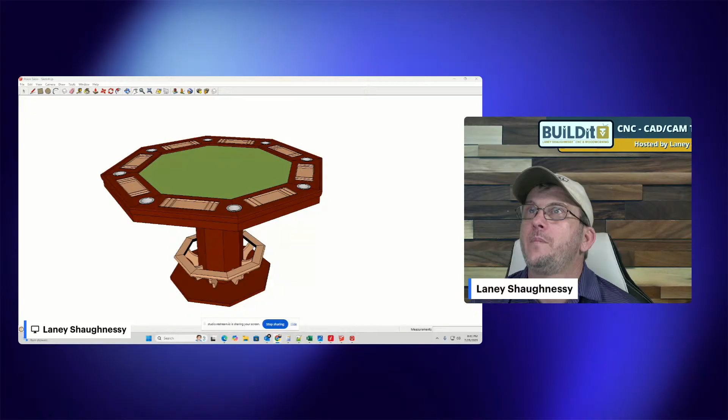Let's talk about the design. Let's switch places here. And the poker table is... let me get this kind of view here. Bear with me just a second.

The poker table itself, from the outside of the trim to the outside of the trim on its short flats areas, we're about 4 foot, so 48, 52 and 3/4 inches altogether, about 52 inches wide, 52 and 3/4 inches wide. And it's an 8-sided octagon table.

As you can see here, I changed up the sides. So after our last class, someone had commented in the comments section. They said, Laney, why aren't you putting the cup holders on the seams so that way it could work for either a left-handed or a right-handed person? And that would give more room for the card area. I went back and looked at it again, and I thought, why not? Why am I not doing that? So the area on the seams are cut out on the parts for the cup holders and all, so it will accommodate for a left-hand or right-hand person.

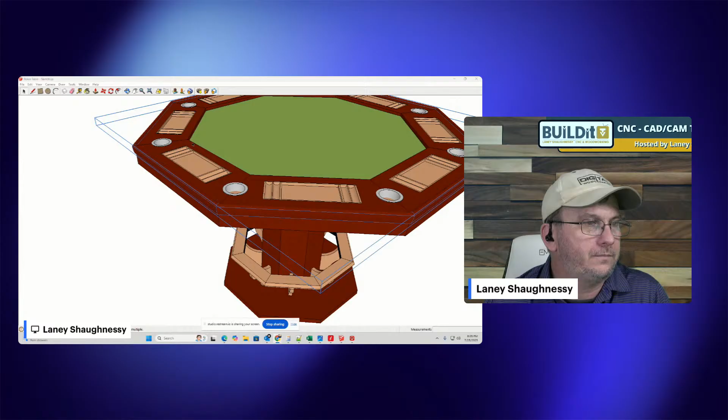Now, the felt in that cushion area is getting wrapped around a piece of 3/4 inch, either MDF or plywood, your choice.

Sorry, guys, if y'all see my hands kind of beat up. I was working out in the yard on the property, and bougainvillea bush, they got big old thorns. It tore me up from the floor up, boy. It kicked my butt, but I won the battle on that little escapade.

So either 3/4 inch plywood or MDF, either one, it doesn't matter at that point. Now, let me hide this for a second. Let me hide these three things just so I can come in here.

There is going to be an apron applied. It's 2 inches wide, 3/4 inch thick, and that's going to be rabbeted in, or it could be butt-jointed in, like I have it here in the drawing. Either one works, underneath those pieces. And then we're going to have a trim.

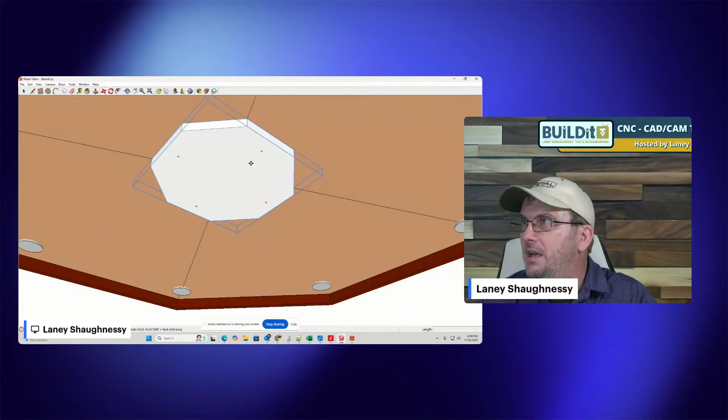There's going to be an octagon plate, MDF again, or plywood, whatever. It's going to be secured underneath, and then the...

Octagon itself, the pedestal — I decided, like we talked about last time, I was going to do the 3 legs, and we're not going to do that. We're going to do a decorative octagon. Now, I didn't do the decorative part in the SketchUp drawing, because I'm just not that good with SketchUp drawing.

But when we get over to the Vectric software, you will be able to see the pedestal parts. Let me get maximized here again.

On the pedestal parts, the octagon, they're going to be 5.5 inch by 3/4 inch boards. They're going to have 22.5 degree miters on each edge, a total of 8 of them, to create that octagon.

But right here in this area, on each of the parts coming around, we're going to have this 3D carving on those pedestal pieces. So we're going to give that pedestal some nice detail. We'll talk about that more in just a minute.

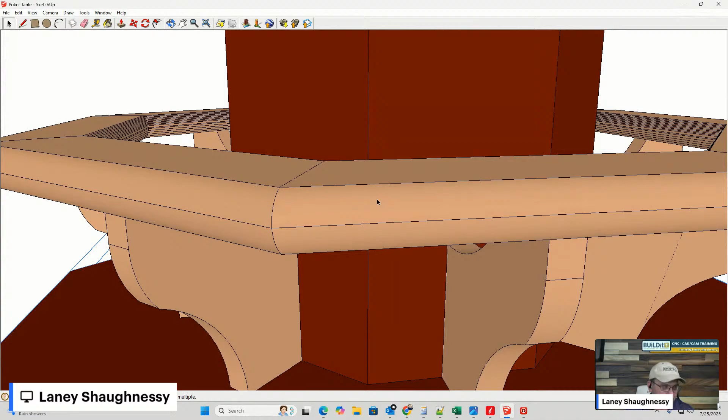But there's going to be a foot rail. I got to thinking, like when I'm sitting down at the table, I like to be able to just prop up a foot or two. So I think adding a nice kind of footrest or foot rail around is going to look good.

And the rail design is similar to almost like this layout, if you will. We're going to have a 3-inch wide foot rail, roughly around 1 inch thick, 7/8, whatever. And it's going to sit on the rail.

Now the rail — again, I didn't get fancy in the SketchUp drawing on the rail here, but the rail pieces are going to look like they complement the pedestal. When we come into the pedestal, the rail pieces — let me get this switched around here. Let me turn on both sides for the two-sided view. Bear with me a second. Let me flip over to the other side and make sure it's turned on.

Let me turn off the zero plane. Bear with me just a second. Let me turn off the modeling plane. There we go. Let me get it in the proper orientation here. All right, so the back here, let me turn this a little bit.

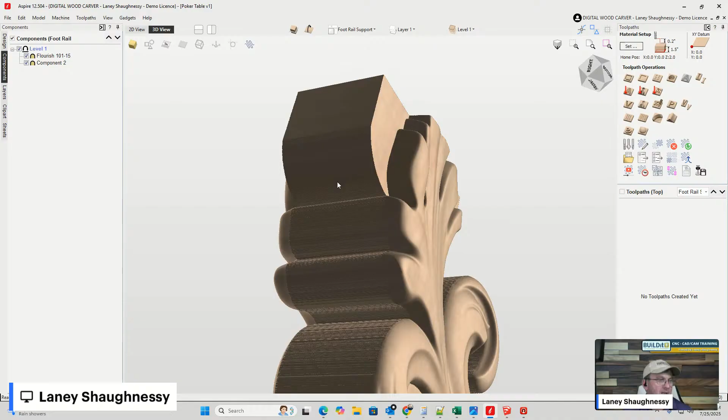Now, the rail is going to get glued on. However, I did create enough room that if someone wanted to secure it with screws, they could drill a pilot hole with a countersink. They could screw from here up into the bottom of the foot rail, and then take a plug cutter off a similar type of material, cut a little plug, glue it in, sand it, and kind of hide the screw head and countersink.

They can do that right there in that area if they want to, or they could just glue the footrail on, either one. This is going to be the supports, the footrail supports going all the way around all the sides. That's what I landed on for the design for this table.

JR, yeah, it's screaming for some brass detail, brass parts and things like that for sure. There's all kinds of supports where you could do brass tubing around here. You don't have to get stainless steel in here. You can do different color brass, gold, all kinds for the cup holders. And then of course you could also do some kind of inlay treatment as well too, however you want to decorate it up, right? And all that stuff.

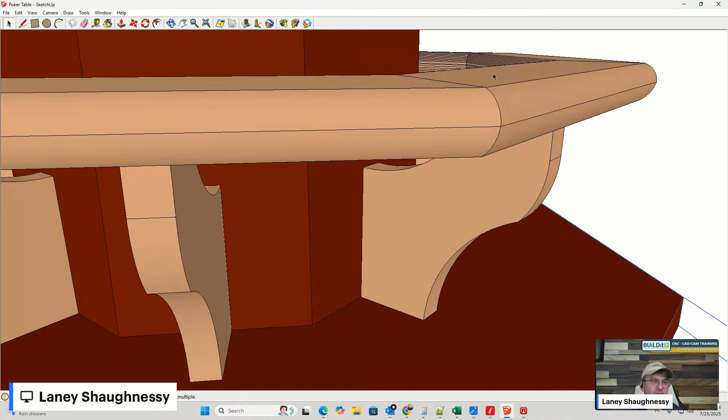But to be honest with you, a half-inch roundover, half-inch radius roundover on a router table—you would be able to run this board through, flip it over, run it through to do the roundover on the front and the back. As far as the bottom rabbet and everything, that could be done very quickly and easily on the table saw, but it could also be done on the CNC.

So if it was being carved on the CNC, let's call it like a two-sided project. You would have a long board. It would do like a tiling job, almost like a tile job, or you could have individual boards and cut out your individual parts, whatever you want to do.

And you could do a pocket cut that removes this material, and then you could have your roundover that does the one edge—everything gets flipped over. Of course you do the back first and do that roundover because the back is flat. So you do this roundover first, flip it over, do this pocket, do this roundover, if you wanted to do it on a CNC.

And you could do it as one long piece, pass-through carving, and then take everything over to a miter saw to cut your 22.5-degree angles. Or on a table saw sled, you could do your 22.5-degree angles and things like that, whatever you wanted to do. So let me back up here.

The top parts—let me pull one of these out real quick so you can see what's what here.

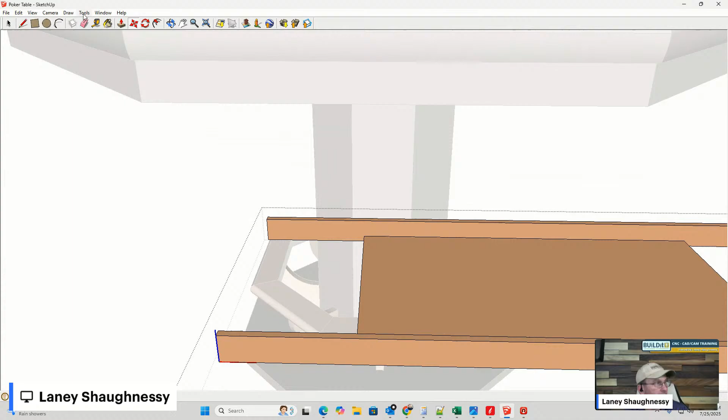The little strips that create the box—you have an 1/8 inch strip here and here, 1/2 inch by 1/8 inch, I believe, for your front and back, just to pin nail or glue that together. And then you have your 1/8 inch base that goes in between so that when everything is together, on the bases here there'd be a small little rabbet that you could cut to glue this inside base end to the inside of these. I didn't draw all that in SketchUp and everything, but you would make 8 of those.

So there's a few hours for sure in carving time for this. As far as building and everything, honestly, waiting for glue—you got your glue up and everything. And by the way, speaking of glue up, the hardware that I settled on—give me a second.

The hardware I settled on was this here, a 10-pack for $15. This furniture hardware is called a draw bolt, 5/16/18 draw bolt by 3.5 inches long. It goes into a pocket underneath like this. So they're going to be glued in, but they'll also be draw bolted together on the bottom of those parts. So that's going to be the hardware.

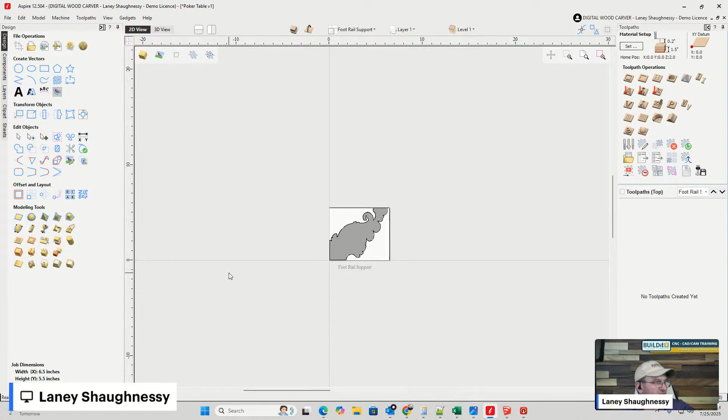So you're going to need 8 1x6 boards, 3/4 inch thick, 8 1x6 boards 3/4 inch thick. That would be the pedestal itself. And there's going to be 8 of those carvings, those 3D carvings we're going to look at deeper in just a moment. That carving there is going to take a little while, quite a while, Ronnie, to answer that question. That's going to take a bit. I haven't calculated any toolpaths yet, so I don't know what the estimated times are, but that's going to take some time.

This is a 3/8 inch by 4 1/4 inch wide by 24 inches tall. The overall length of this board is 30 inches. So that's going to be a 30-inch pedestal. And then 5.5 inches wide, a 1x6 board.

Each of the pedestal foot rails - those are kind of a 7x7 inch area. I'm sorry, that's a lie. 7x7, we're going to talk about that in a minute, but it's 6.5 by 5.5 inch. So a 1 by on that. Now this is two 1x6s, I keep saying 1x6s, so 5.5 inches wide, but it's 2 of them face glued together to create a 1.5 inch thick board. So this is going to be 1.5 inch.

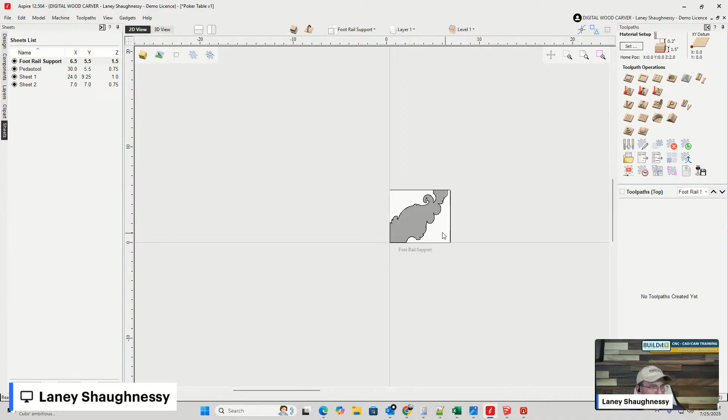So this is also a 1x6, but it's 2, so there's 8 of them, so that's going to be 16 pieces, and they're only 6.5 inches tall. So however many linear feet of that, that is, and all. I'll try to put together an exact cut list of the boards, but this will be a 2-sided job, and it will be carved on one side than the other.

Now we're going to get into this in a little bit deeper, and I'm going to talk about how we're going to carve these very easily without having to do like a profile cut and all that stuff. We'll talk about that in just a minute. Talk about work holding and holding our parts and all that stuff here in just a second. We're going to get into that. That's going to be part of the class tonight.

As I said, I landed on the individual parts. I landed on the cup holders, being on those 22.5 degree angles. And if we look at the other side, the holes for the drawbars, they're going to be there, and everything. There's going to be a 3/4 inch rabbet from here to this edge, a slight rabbet just for positioning that 2-inch apron.

You could butt join it as well. It's going to be covered with trim. We're going to talk about drawing or carving the trim. The trim will be carved, so that'll take some time as well.

But you could butt join it, or have the trim carved. I'm going to put a little rabbet on these pieces since I'm carving on both sides anyway, just for positioning when they get glued together and all that stuff.

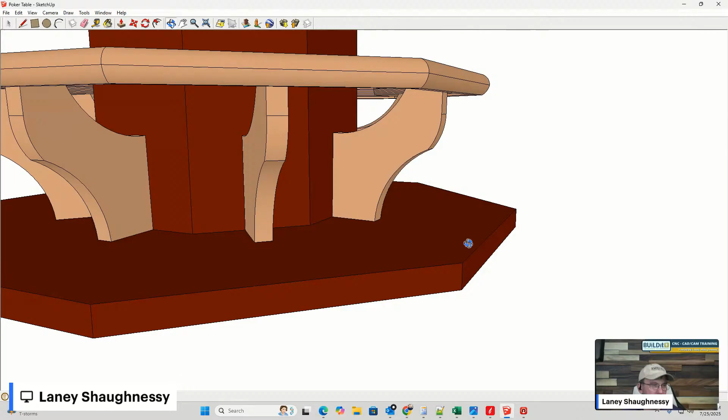This bottom base is most likely going to have leveling feet inserts put in here. It could be plywood, like oak plywood, whatever your finish is. I wouldn't use any cheap plywood unless you're going to put a veneer on it or something. They have oak, mahogany, walnut plywoods and everything. But it's going to be trimmed with solid wood.

Now, if you're ever working in SketchUp, I want to talk to you about the Follow Me tool for a moment. Let me hide all of this stuff so we have just this area right here. When you're working with the Follow Me tool, the one thing you have to do is draw a profile, you have to have a face, a perimeter for what you want to follow.

So when I'm drawing my faces, I'll usually tend to start with a rectangle, and I'm going to get in the middle of the field here on this straight edge. I'm going to draw a rectangle. SketchUp sometimes is tricky, it doesn't matter where.

Lord have mercy, I'm not going to use the rectangle tool because it drives me crazy on this. I'm just going to use my pen tool. Pick a spot, I'm going to draw a line from here straight down. Then, since this trim is not going past or anything, I'm going to come out, and it'll be a 3/4 board probably. So we'll just call this 0.75.

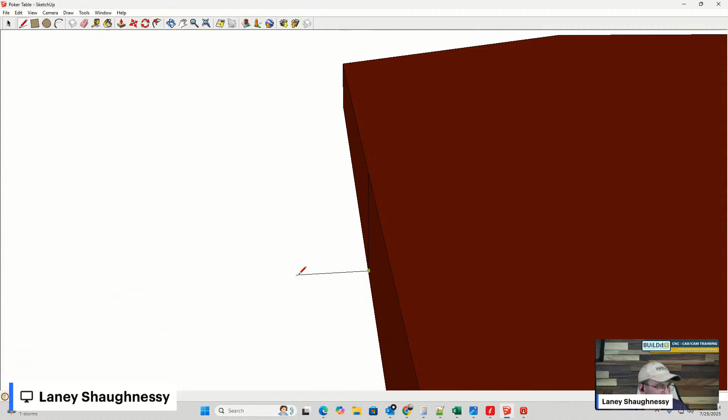Now, you see how that did that, how it created that and drew it crooked? That's because my second line was crooked. Bear with me a second. Got to come out straight, not at an angle like this or anything. Come out straight, I need to come out 0.75.

And now this is important. I overdrew this line, right? So the... sometimes it wants to act up. All right, there we go. So now we have this face here, okay.

Now, with this face, I'm going to still... geez, Lord have mercy. All right, it's still a little crooked. Let me see how crooked it is. I'll tell you how crooked it is. Let me see, it's that crooked. I don't mind it, Lord have mercy. All right, let me Q for rotate.

It does not like that edge for some reason. Why doesn't it like my edge? There we go, okay, that's better. All right, so let me pull that back to a face.

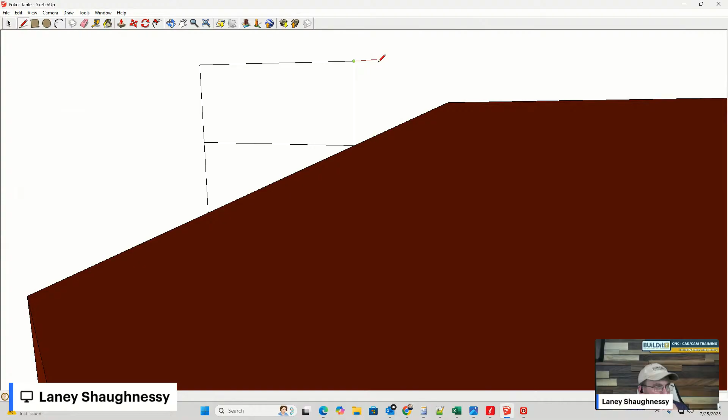All right, I'm going to go over by about... let me see here. I'll do a 1/4 inch overlap on this. So we'll come out. And I'm sorry ladies and gentlemen, this is driving me like nutty right now. My God.

0.75, comma, 0.75. Holy cow, what's going on with my... give me a second, my SketchUp is acting weird. Let me just hit save for a minute. Stop messing around, we got a class to teach ladies and gentlemen. I'm trying to teach y'all and I can't even get things right. Okay, 0.75, comma, 0.75.

You gonna play nice now? Oh, my... base for some reason is 1 inch thick. That's one thing that's throwing me off. Okay, so that's fine. 0.75, comma 1. You booger. Let me try that one more time. 1, comma 0.75. There we go.

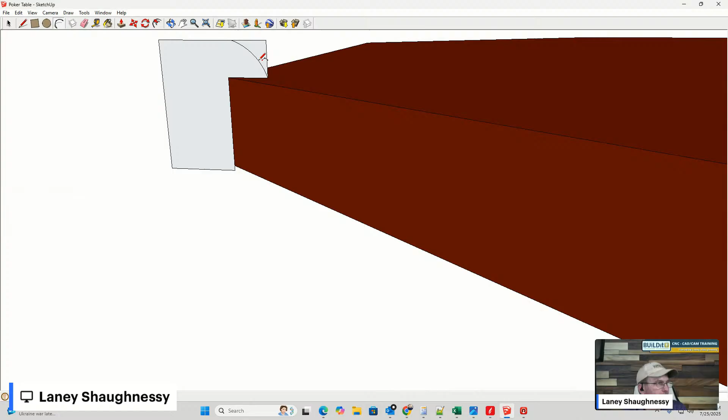Not that kind of round over, you goofball. This kind of round over. Why am I struggling today? There we go, so it's going to have a round over.

And let me get rid of these lines here. And then on the back side, same thing, it's going to round over. And it's going to... ooh, that lightning bolt went through the building. Lord have mercy, okay, the...

I'll pull this in just a minute. But man, that got me. Okay. We still have internet, I believe. I didn't lose internet on that one. So I'm happy with that.

Now, on here, let me get this. Come on, dude. Give me just a second ladies and gentlemen. Holy shoot, sorry, my mind is on the storm and not on my game here. Okay. Jesus Laney, pick the right tool, brother.

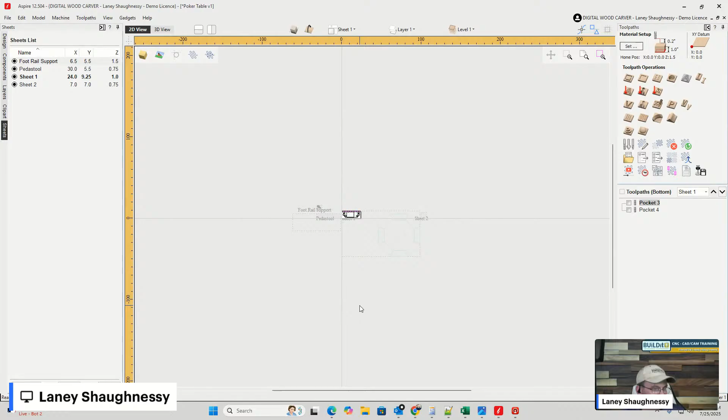And everything just crashed. Are you joking? Don't send. God almighty ladies and gentlemen. Hold on a minute. Thank God I saved it.

Okay. God help us all, I am just going to... I have to do this really quickly. So I want to come out a half inch, down over. I want to come up another 3/8.

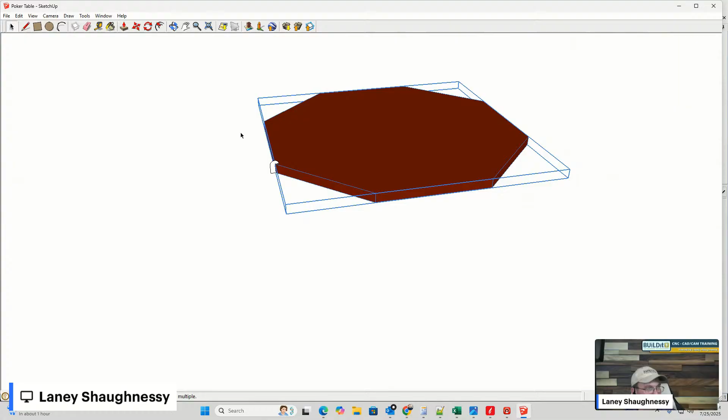Once I have a face that I can extrude, the next thing I need is, before I use the follow me tool, because that will allow me to extrude this face along a path, I really need to select the path I want it to follow. So one of the easiest ways to accomplish this is to take the line tool and outline the path you want to follow. I'm going to hit all of these points here and then come back to that.

Now that area I just laid out, those lines, I'm going to select them, hold down the shift key, and select that perimeter that you just drew. Once the perimeter is selected, open up the follow me tool and then select the face that you want to follow. That will create the nice miter joints and everything for the trim.

Let's come in here and hide this. So there is our trim. Let's go on the bottom side of this and everything. So any trim that you're ever trying to do in SketchUp, create the face, draw the lines, and get that single face created.

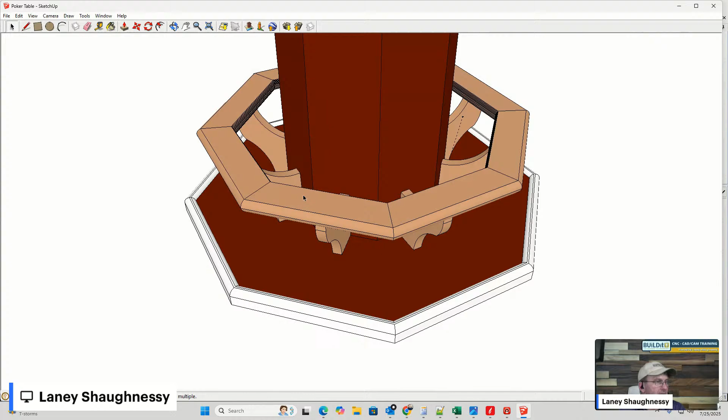All right, so let's go in and unhide this. That's the same way this perimeter was created. So if I hide this, that face was created for that perimeter, and the lines were drawn, connecting each of these points.

But not just from point A to B. There was also a diagonal point, and then it went over to the center point and around. So the 8-sided octagon lines went around that perimeter as well to wrap that trim, or that footstool, around so easily and quickly. All I had to do was just draw out the face and then have it follow that path.

All right, let's go ahead and get beyond that, and let's come up here and talk about this trim, because this trim we'd have to make either on the CNC, on a shaper if you have a shaper in your shop, or something, because this trim, let me pull that off.

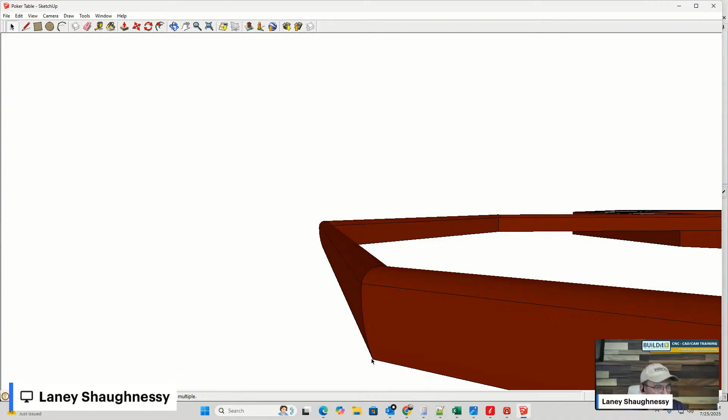On the bottom side, overall on the short end we are 3/16, and then the overhang is 1/4. On the wide edge, 3/16 is the lower edge, so this ends right here at 3/16. On the upper edge, this is out of a 3/4 inch piece of wood, so the overall width is 3/4, and then it wraps around and down to a 3/16 here.

And then there's a 1/4 inch rabbet cut on the bottom.

If we were making this piece of trim on the CNC, you can make it as a long stick, have it laid down. It would definitely be a tile job, because it's going to get cut down into sections, and then we'd take it over to a table saw to cut the little rabbet underneath, or a router table. Once that one side is cut, we could set it in something to do the rabbet on the bottom, but that's all.

It's just such a waste of time. Really, if you don't have a table saw in your shop, I honestly recommend investing in one, even if it's just a little contractor saw or something.

But this rounded edge, if we don't have a shaper, we want to be able to make this trim. We could do this on the CNC, and this is what we're going to create right now, so we're about to create that in Vectric.

For this I'm going to add a new sheet. This particular sheet, because I can do multiple of these cuts out of one wide board, I'm already dealing with 1x6s. Just so you know, the overall height of this piece from the top to the bottom is 1 7/16 inches tall.

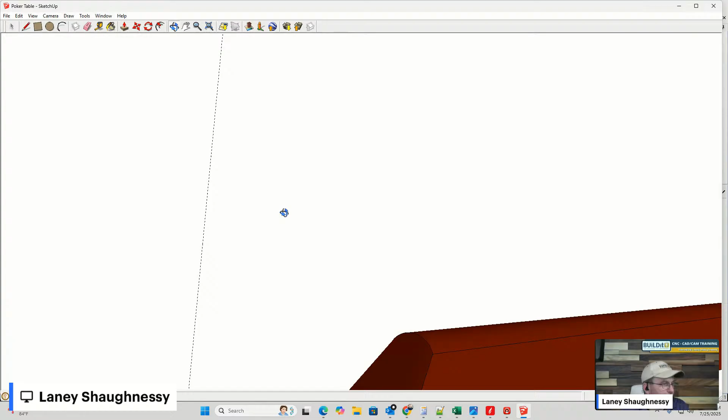Let me get my height here. I believe it's only 1/4 of an inch tall from this point to that point, actually it's 3/8.

Take a guideline, come here, going to come down, or to the right I should say. We're going to create a parallel guide, negative 0.375.

Wasn't that insane? It's a positive, I want to go to the right, ladies and gentlemen. Holy crud, all right.

And then this is going to be 1/4. Now, on this 1/4 inch overhang, this is going to come around, and at my 3/8 inch line right here, it's going to literally come around and just a gradual curve.

So I'm going to go into node editing, pull this down to here, and turn this into a Bezier curve. I want to just kind of, it's not really going to be an arc. I'll pull everything back here in just a second.

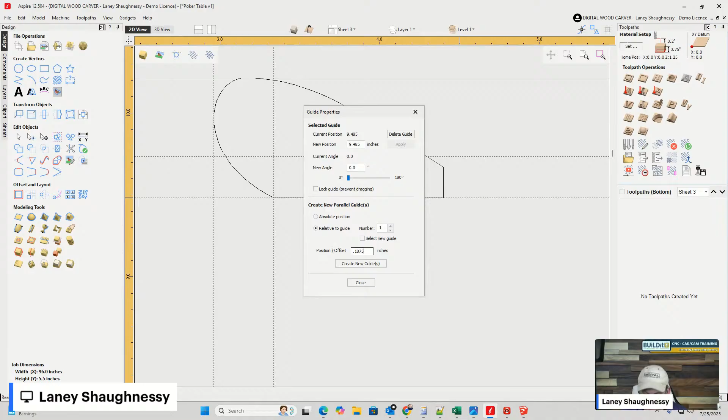This is going to, on this bottom side here, that 3/16, we're just going to have the overhang up here. So literally coming back to here, this 3/16 inch line, let me make sure that is 3/16 right there: 0.1875, 0.1875, there we go.

So I need to draw a line here and then here, and in node editing pull that back — I missed that shot. Okay, trim that away, turn off these guidelines.

Hold on a minute, God almighty, Laney. Get your crap together, brother. Lord have mercy. .1875. My God, ladies and gentlemen, I'll get it here in just a second.

It's very subtle, not a very aggressive curve at all, but it also doesn't flatten out. So bear with me just a second.

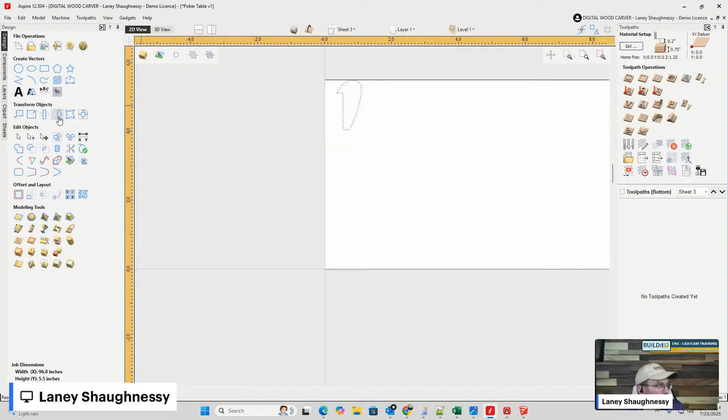Okay, so at 1 7/16 inches tall, I can literally run these, I could probably get 4 out of them. Now when I run these, how I want to run them is I'm going to go into the mirror tool and create a mirror copy, flip this to the bottom, create a mirror copy, and flip that back up. Then I'm going to take this and double it, so hold down the control key. Am I going to have enough room to do it that way? No, so I'm only going to be able to get 3 pieces out of this. That's okay.

3 pieces will be fine. So let me go 1, 2.

On a 1x6, I'm trying to stick with the same size material, so I don't have a whole bunch of different material that I got to go buy. If I want to buy a bunch of 1x6s for the majority of the part, let me go ahead and align.

I'm going to select these 3 items here, and I'm going to select this rectangle that I just drew last because I want to align them with equal spacing in between, and also align them with each other. But I'm only going to be using this one profile. What I need is to know where these lay out, because I have to draw my lines, my 2-rail sweep lines, or my one rail sweep if I'm going to do a molding toolpath.

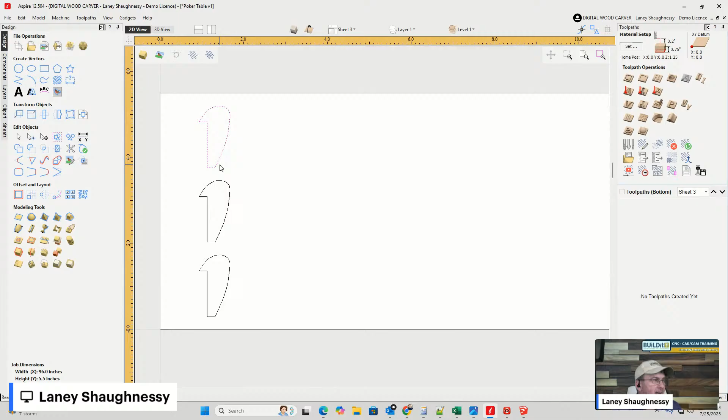And when I am doing this, the profile—you've got to think about these in half. There's side one and side two, it's a two-sided job. So side one, if I were to take this and divide it in half, if you will, I can't do any undercuts. So I have to make sure that this is getting divided in a way that there's no undercuts in the part. And also, I'm probably going to just end up coming up through, if I can get myself to snap it 90 degrees.

And that right there is an undercut, so I'm not going to waste any time with this. I had so much of this done, and I should have thought about the hard stuff in Vectric. I need to reshape this, because I don't want any undercut.

So I'm just going to pull that up. Okay, I'm happy with that. Alright, so...

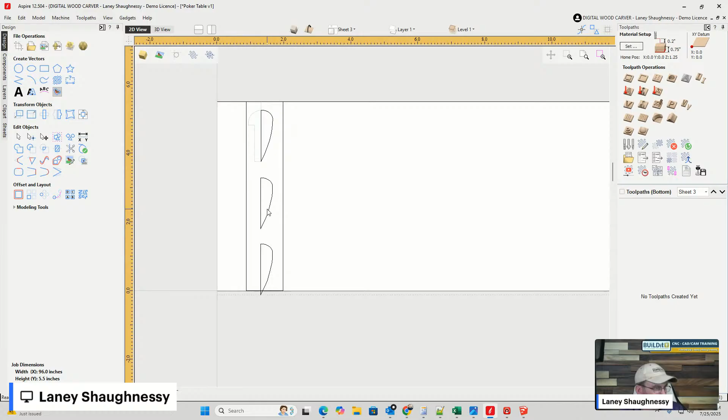Once again... I don't know why, I honestly don't know why I'm struggling tonight, ladies and gentlemen. I don't know why I can't articulate or say what I want to say properly. It's like I'm thumbing through this, and I know what to do, I just don't know why I'm not able to say it, so I apologize.

Alright, anyhow, we're going to align once again inside that last vector. What this is going to do is allow me to get my lines for my drive rail, either for my molding toolpath or my 2-rail sweep, whatever it is I plan on doing. So in this case, I'm just going to essentially outline a box, if you will.

I'll get rid of the ends in just a moment, but I'm going to snap a copy of that box to there, and a copy of that box to here. And what this will do for me is give me my drive rails, if you will.

And on the end of these, I'll go ahead and just go into node editing and delete the span on the ends. Then I'm going to take these nodes right here, and if I select this node first and just move it up and get it aligned right here, if I hold the shift key down and select these other nodes, I can hit the letter X on the keyboard to pull them back. Okay, and then the same thing over here—let me delete the spans.

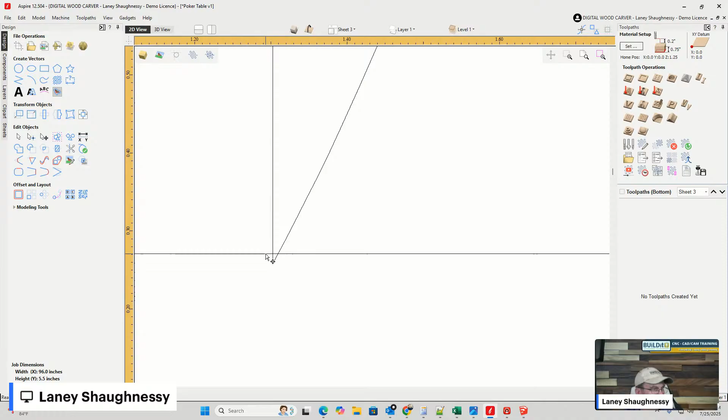Now, depending on, and this drive rail, I completely missed the end of it. Make sure that's the case for all three of them. It's what happens when you copy a bad vector. There we go. Make sure my tops are good. There's a slight undercut here, overcut. And I'm going to actually fix that.

All right, with that corrected, I'm going to copy this. And I'm holding down the control key and the alternate key so it keeps me in line. I don't want to have to go through the alignment process again and everything, I just wanted to kind of get that overcut away. But this is going to be my top half here, and I'll fix the bottom. I'll redraw it or whatever I got to do to make sure everything blends properly on the other side.

But on this, when we're using a profile, we can't have a bottom span. And these straight lines are a bottom span, so we want to get rid of them. When you're drawing a profile, creating any kind of trim or molding, it's just 3 sides, not 4.

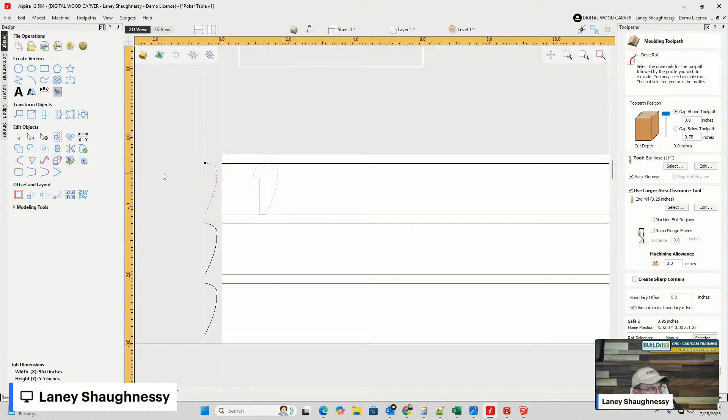And to be honest with you, this profile right here has to be turned 90 degrees like that. When I am - oh Lord have mercy - when you're drawing a profile, it has to be turned 90 degrees so that it sweeps across properly. So turning it upright like that, it thought the vector was going to go a different way.

So if I turn it back, we'll do it with this one down here. If I select this drive rail and I select this profile, it thinks that I'm only running the short side of it, in this area across here. It doesn't realize that I'm running this whole span.

But once I turn the profile 90 degrees, then it realizes - let me draw a reference here - it realizes that this is the base, that straight line I just drew, and the shape is getting swept along that base. So the profile has to be turned at 90 degrees.

So I'll do the same thing here. It's just one of the rules of the game. It doesn't matter where they're positioned, they're all laid out at this point. What's important is my rails. So if I'm using the molding toolpath, I want to select the drive rail first and then the profile.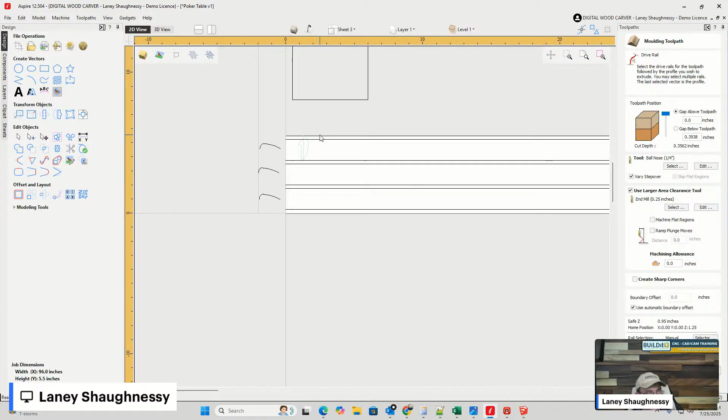But if I try to select the 3, it thinks that I'm doing something with this. So long story short is, once you have your rails laid out, you can either do one at a time by selecting the rail and the profile, create that toolpath, then do the next one. Or, since we're going across the whole board, select your profile rails. It's going to be funky to begin with.

It's going to draw these lines straight down, but keep going. Select those 3 rails, and then select one of the profiles, and it knows that profile is getting swept along those 3 lines. So you don't need those other 2. Just make sure you select your vectors properly.

It's confusing because you go to select one, you select your next one, you think, oh shoot, right here, once that happens and those lines get drawn, you kind of stop and you go, what's going on. And if you're new, you really can't figure out what in the hell's happening, what's going on here, excuse my language. So you don't know to keep going or any of that stuff. You just know that shouldn't be there.

If I select one, and then I go to select the next one and this one, all this funky stuff starts happening. Kind of crazy. But get past the obstacle of selecting your rails, ignoring what pops up. Then the moment you select your profile, it knows that those 3 are the drive rails and your profile is what's getting swept along those rails.

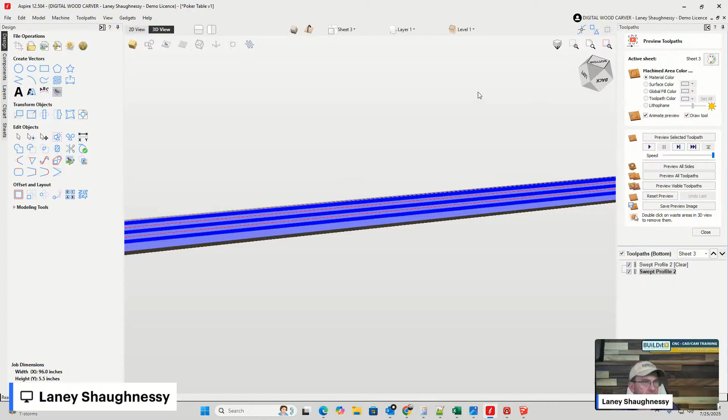And if we look along the left side of this, you can see the profile that's getting created. Now these are going to get, we're doing 3 on one board. And the length of that board, I mean, we only need 8 of these pieces, right? So 3, 6, and each piece, just so you know, from long point to long point on this part...

Long point of the 22.5 degree miter to long point, you're at 22 and a 16th inches. So 22 and a 16th, that is 44 and 1/8. That's going to get you 44 and an 1/8 long board, which is going to get you 6 of your 8 pieces.

Another 22 and a 16th on top of that, so that would be 44, 22, 60, 66 and 3/16. That will get you 9 pieces. You only need 8, so you have 1 as an extra, right? So the length of your board, if you're doing tiling and stuff, only needs to be the 66 and 3/16.

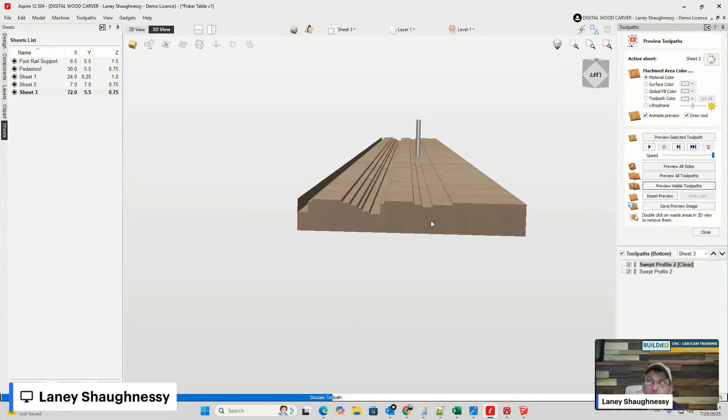Let's preview this cut and see what we've got going on. Now, this is side 1, okay? This is a 2-sided job. So on this cut, the rough cut, the end mill is going to go through and mill away the waste. Then our finished cut comes in and makes this cut. Between these cuts, right on this edge, that's where it gets cut. We still have to do the other side, and then cut these parts out.

Now, if I'm planning this out, bear with me a second, I have this rabbet cut underneath. When my board flips over, I only have a little bit of waste on the outsides, so there's not a whole lot of stability. We're going to talk about ways of holding wood in our other piece here in just a minute.

But on this one, let me think about this for a minute. If I were to run these two profiles in this direction and the other profile opposite, facing the other way, I would have a little bit more flat, a little bit more stability when I rabbet these pockets off. These two pockets would get rabbeted, this pocket would get rabbeted, and I'd have a little bit of wood here for stability when I flip this over to sit it on.

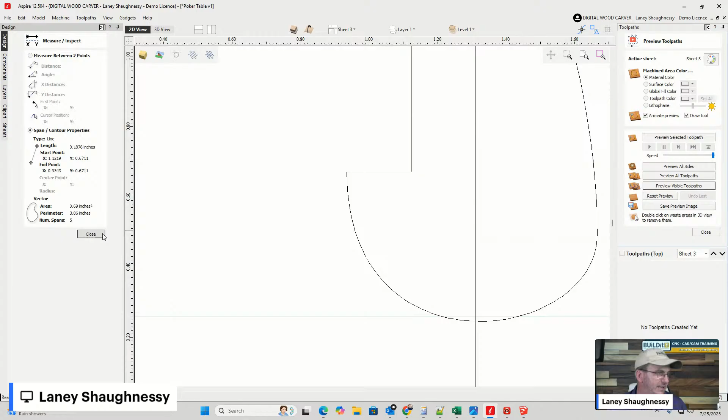This, mind you, let me rotate this around real quick just to verbalize this for a minute. So imagine, if you will, my table saw bed here, and this is going to be a straight line. At this point, it's going to look like that when it's a full piece. You're going to have your fence, however big your fence is on your table saw.

This cut here, this 1/4 inch cut's already been cut. That was the first cut on its back, that first little cut right there, all the way to full length. And then this is going to ride up against your fence and your bed. Your saw blade, let's pretend that this is your saw blade. It's going to be up here, so that's your saw blade and everything. And you're going to run this along. Now, when you run this along, that's going to be removing, cutting this waste area here. So that's going to have this thin strip right here between the fence and your saw blade. It's going to be trapped in there.

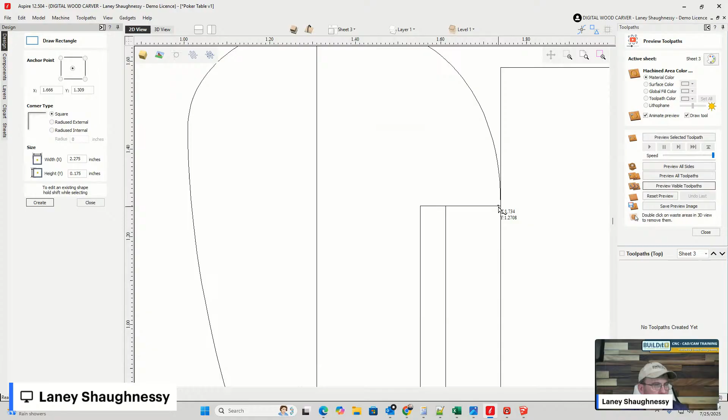But once you make that cut, since this notch has already been done, right? So the blade, imagine this is your 1/8 inch blade cut, that first cut right there. Once you run this upright and everything, this little piece is cut free, and now you've got your notch in the back. So doing it at the table saw is going to be much faster than in a router table and everything.

And the only thing that you would need to do is make sure that this radius cut here, if you're going to go this full radius—and hell, you can even go straight up and then radius over, whatever you want—make sure that on your router table, this profile right here matches whatever bit you own. 1/2 inch radius, make it work. I probably could do, if I did a 1/2 inch radius here with a little bit of a straight lip right there, it would look clean. I don't think, let me look at my actual trim here on the back side.

My round over is literally based off of a 1/2 inch router bit, so there's no funky shape to it at all. That's a round over, cut on 2 sides here. And then this is the one right here at the end of the round over—this is the one that's got that taper. So this is like a 1/2 inch round over, so 1 inch on both sides, basically.

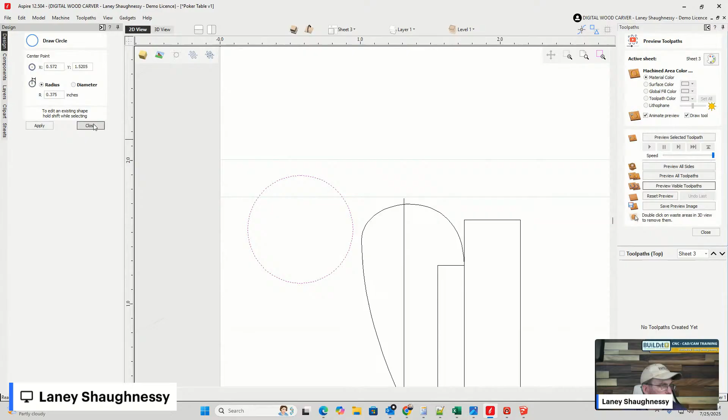If I came in here and node editing, I'm going to cut the vector right here, and I'm going to take this vector and hold it up against this edge, then hit the letter T on the keyboard. Is it going to let me do it with a curve? Let me turn this into a straight line. So I'm going to hit the letter T on the keyboard.

Okay, maybe the T is not going to work there. Bear with me a second, I'll draw a new line. Maybe the line tool has to be open. Hit the letter T. There we go, T for tangent. All right, so it wasn't working on my existing line there.

Let me get rid of that span. Go into get rid of this span. Go into my scissors, cut that.

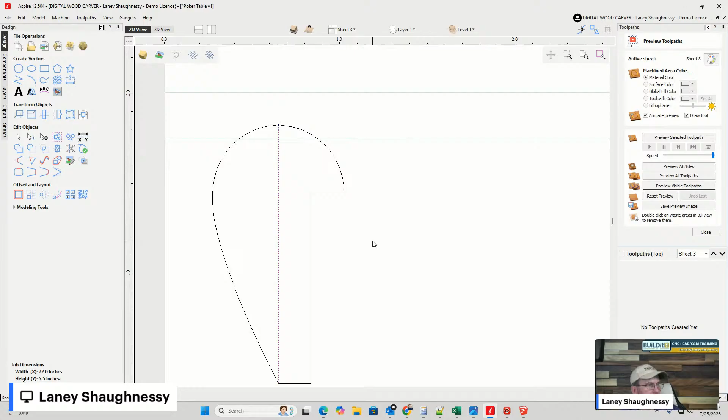Let me go into node editing on here. Oh, don't do that, Lord have mercy. Right here. 90 degrees, everybody. So this is side one.

Again, moulding toolpath, your 1/4 inch bit. There's no undercuts or anything here. Side one, and then once side one is done, you can take it over to the table saw, rip your strips out, okay, right at the end here and here, lay it on its back, run your blade 1/4 inch up, set your fence accordingly so that we're making that

notch cut right here. So this part would be on its back like that, and the blade would be here, running that whole strip, that whole length, and then turn the part upright. Again, that piece of wood is still there, it's still square here. Put it up against the fence, raise your blade up to this line here, and rip that little strip out to create that notch. And that's going to be much faster than trying to set up and do it as a two-sided thing at the table and all that stuff.

All right, so let me fix this because that is the profile that we're going to use. With that round over, there is no undercut at that point. But let me do this really quickly.

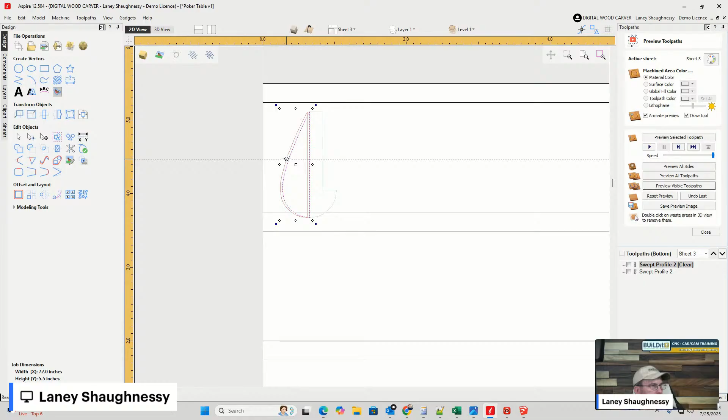I'm going to rotate this 90 degrees this way, and go into node editing and delete this span. I'm going to go back into my profile sweep tool. I'm going to select my 3 rails again, 1, 2, 3. Come back and select this profile.

And then we're going to calculate. Reset the preview. Preview the visible toolpath. Rough cut's going to cut that.

Now, this is on a 72-inch board. At this point in time, you can either set up a miter saw with a 22.5 degree cut, set up a little fence and stop blocking, and make your cuts for your pieces. Your parts have to be 22 1/16 inches in length, and you need 8 of them to create that octagon for your outer trim.

All right, and so that is going to be that versus trying to do it all on the CNC. Okay, let's move on.

To our foot parts for a moment, because this one is a little bit unique, and it is going to be a two-sided job, and we are going to create a bit of a fitted holding piece to it. So there are, on our foot rail, the foot rail, let's go back over to side one here.

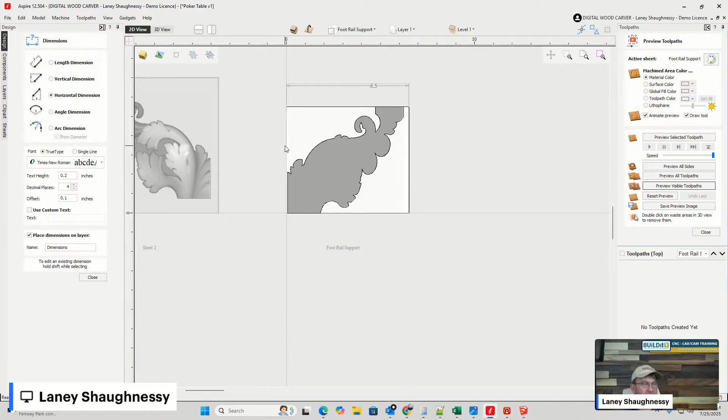This is going to be 2 blocks, 2 3/4 inch blocks glued together. So you need 8 of these, so you need 16 blocks. You don't have to make them this size, you can make the board a little bit bigger or whatever, but this is right to size. There's not a lot of wiggle room on this part.

Now here's the deal. Let's look at this in the 3D view. Let's close this and look at one side. I'm going to turn off the other side and look at the components that we have here. If I turn off the flourish, or the backboard if you will.

This flourish comes straight from the clip art. On the clip art, this flourish right here is item number 101-15, and I'll see if I can drop a small version of that in there. But that's the entire flourish, this part right here. So that's what the flourish looks like.

Now on this flourish, it's getting nipped right here, where that footstool is going to go. And on the back side, it's getting nipped for this 90-degree area here. And so coming in here, that 90 degrees is actually right along here in this part.

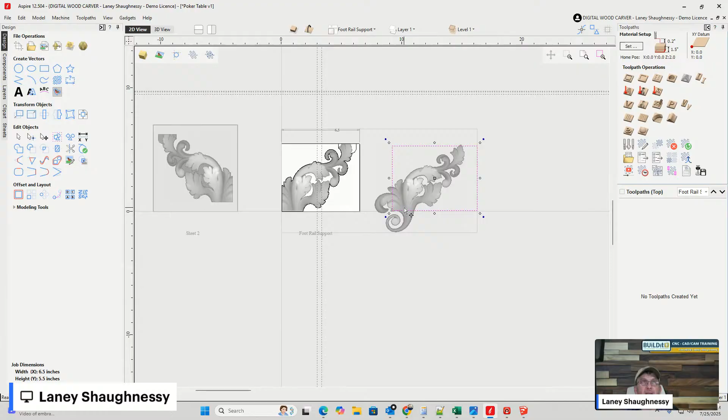In Vectric Aspire, you can delete anything outside of the selected vector on your part. So if I were to come in here and select the component, select the vector, and clear everything outside that selected vector - it won't do it while I'm off the board, but then it's going to get rid of everything on the outside of that vector, leaving this part here.

Now opposite of that, if I use Vectric VCarve Desktop or Pro, I can use clipping. So in the component tree level, I can turn on clipping, and anything outside of my vector will get clipped away.

Now with this, there was another model component created. Let me get rid of this and this, and let me turn that off, and let's look at this one. This was just a flat model. Now here's the deal: if you have Aspire, you can draw the rectangle and then, again, delete anything outside the vector. So that's exactly what happened here - it deleted everything outside the vector, and it created this part right here.

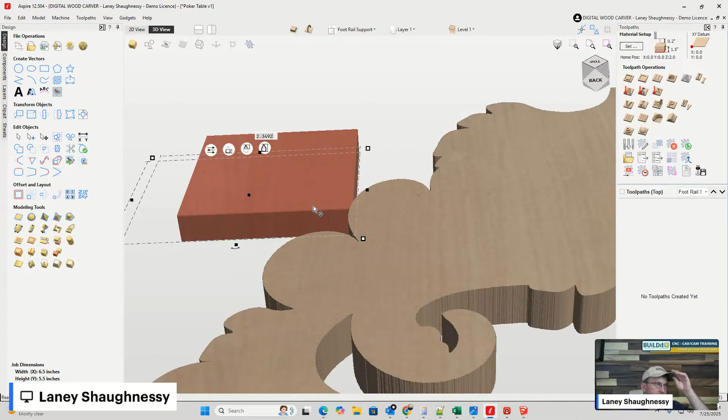And then you just use your vectors and you turn on clipping and you clip the part. So either way, whether you use one of the flat tabs, and then you clip the part - anything outside of the boundary gets clipped away, it only keeps what's inside the vector. Or you make it as a model, you draw a rectangle and make it as a model if you have Aspire. Either way, point A to B, both get you the same position.

So let's do it. Let's do it as if we were doing it with a tab, just so you can see. I'm going to go into components really quick and turn off this component. I'm going to scale this square tab up to fit the whole block area here, if you will.

And then the vector, so these two here, I can select the vector, hold down the shift key, select the component and all. And if it was the only thing on that component or whatever, I can do clipping. I can apply that to the entire level. And so all you would see is that part.

And of course, the part is get it to the right thickness. So you go and double click on here and bring it down. It's 3/8 inch thick, so 0.375.

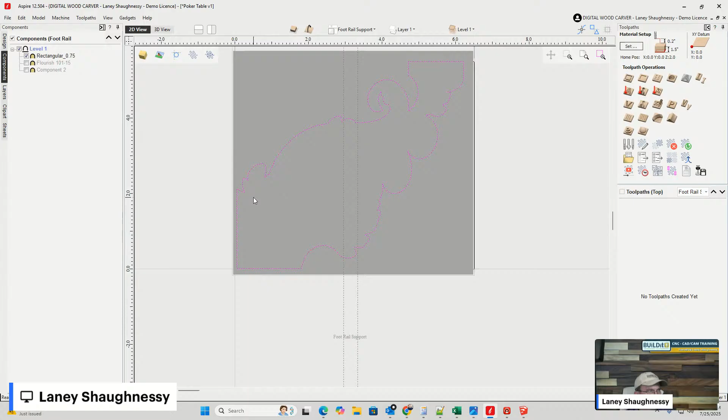That part is not off the board. Turn this off. Turn that on. Ah, that glitch gets me every time. I don't know what it is, Vectric, but fix it. Lord have mercy, I was trying to figure out what that line was. Anyhow, had to turn it off and turn it back on.

All right, so anyway, there's that part, and that's just using one of those flat wooden tabs. So however you get it done, get it done. But that's the one part. This is the middle, it's 3/8 of an inch thick.

All right, now once that part is created, the flourish is getting merged with it. And the flourish also has a 3/8 of an inch base right here. Okay, if we look at the flourish, it has the shape. So the actual shape, from the top of the shape to the top of the model, is 5/16. And then the base, that straight meat, is also 3/8.

The reason for that is because the other part has a little extension up here that goes past this. So when they're both turned on, you'll see when they blend together that this little part is added here. So this part is added, one, to give a little bit more of a foot for that footrest to sit on. When the two halves are back to back there, we have a little bit more of a foot. And also that area is there because, if I want to drill a hole here and screw up into the foot and then plug that hole, that gives me that wood there as well.

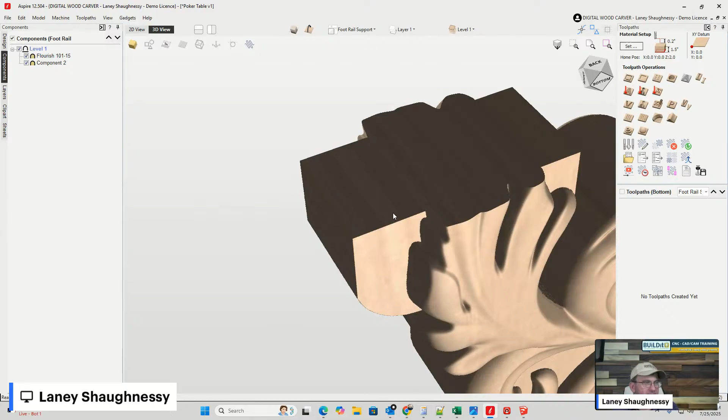So when I go over and turn on the other side, and I'm looking at this as a two-sided job, this top side here has a little bit, besides just the little flourish right there, it has this flat area here, which is a good foundation for the parts to fit on.

And the reason why I want that foundation there, there's a reason. One, again, I can drive a screw straight up through there into the bottom of that foot if I want some hardware in there. And I can throw a wood plug there, make sure the plug grain and the grain of this piece match, go together. And that way it's kind of almost like invisible. But also there's a reason for that.

If we go look at the SketchUp design, the foot, this foot area here, and again, this is only 3/4, so imagine this being doubled. That's how wide the foot is. It is kind of in the middle of this run, and the joint, the 22.5-degree joint, is between both of the feet.

Now, strong joint, not going to be a problem or anything. You can edge glue it together and no worries there. You can, if you want to, use a draw bolt, one draw bolt on each one. You could use a Forstner bit to make your holes and a router bit to cut your path, whatever you got to do. You could do it on the CNC if you want to as well, but you don't have to use the draw bolt hardware here. This is a short enough span. There's going to be plenty of support there, and that glue joint is going to be strong. Nobody's going to be kicking it open anytime soon.

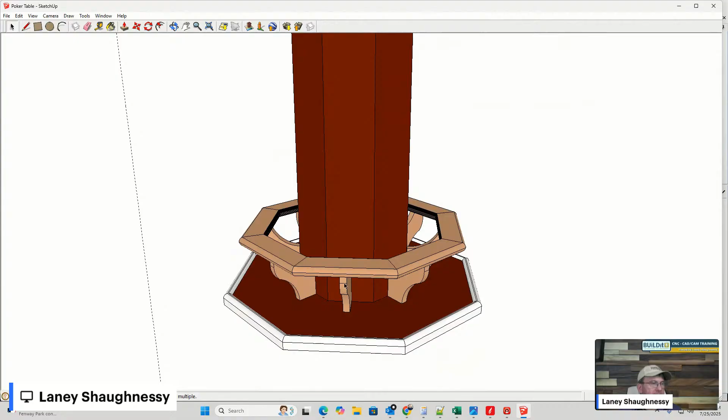For the footrest, on each of those, when you're gluing up your octagon, the pedestal frame, this pedestal frame here, each of these are going to get screwed right in the center of that pedestal base. So you will be measuring, marking, aligning, gluing, and screwing each one of these footstools flush with the bottom.

So let me hide this. Oh, I didn't make that a group. Anyhow, you take this and this. Give me just a moment, folks. Trying to see if this is grouped in.

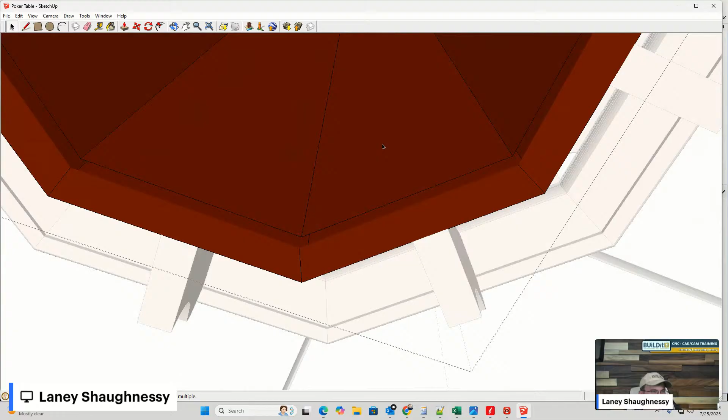My trim is 7/8. Anyhow, the footrest is going to get screwed with 2 mechanical screws going right through the panel and into here, and glued. So glued and screwed right there.

If you wanted, we can add in, we'd have to change our model up a little bit on the footstool, but we could do a rabbet, since we're carving the 3D model on this piece anyway, we could carve a little recess pocket there. We'd have to put that recess on the back side of our footstool so it fits in. But right now I have this just face glued and screwed to there, whatever you want. We can incorporate that in.

But you're going to do that first for all 8 of your parts here. And then you're going to glue up your octagon podium, right? Glue up all those pieces and stuff.

So run them through your table saw, turn your blade, tilt your blade, and cut that angle on each edge. And you've got, because this part, let's go back to that part.

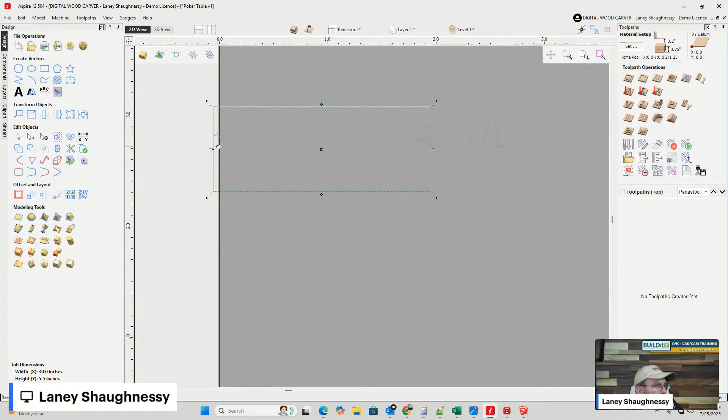Let me get rid of that number there. There we go. We could do a pocket cut there, but if we did a pocket cut, very shallow, 1/4 inch deep, whatever, just kind of a place for the feet to lock into. If we did that and removed that material there, then on the foot part,

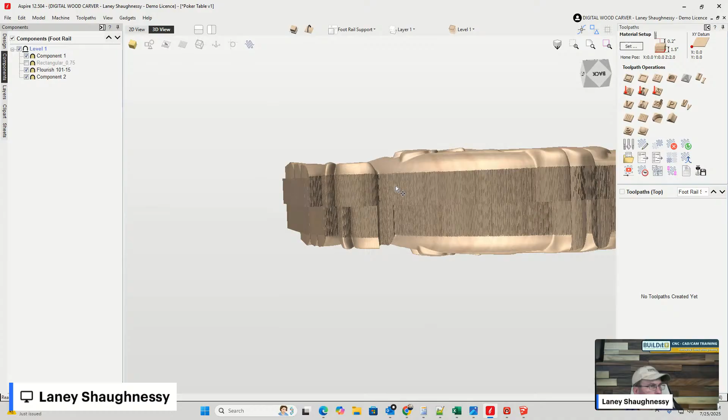Hang tight just for a moment.

Whatever you do to one side, you've got to do to the other. So I need to delete this and delete that, because on this side, those two parts, I moved them over. Remember, I shifted them to the right. So copy those back over to the other side.

And now what I have, or what I should see in the 3D view... wait for it. Let me get this turned around the right way. Work with me.

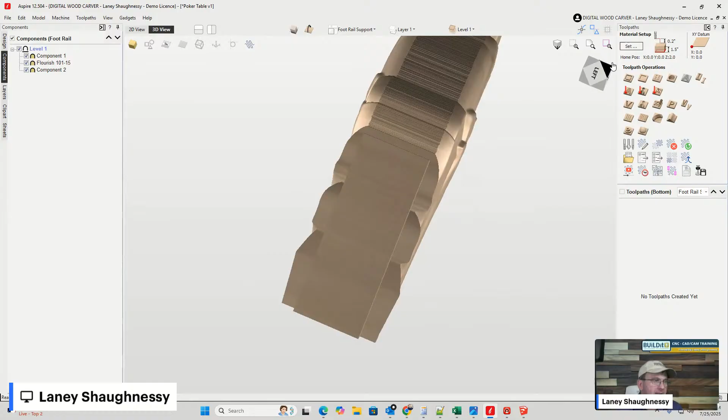Make sure that this is a 1/4 inch, 3/4 wide, a 1/4 inch thick. All right, so now what we have is this little 1/4 inch by 3/4 inch. There's one on each side, but we have this little 3/4 inch notch, and that can go right into the pocket that we cut on those uprights, get screwed in and everything.

But it gives us more glue, instead of just face gluing this to where possibly the part could be wobbly or something, or somebody could be kicking their legs back and forth and you got this thing all flimsy, right? So this gives it a little bit more structural stability.

So if we do that, and we add that little tenon - that's the word I was looking for - if we add that little tenon on that two-sided cut, then we need to make sure that on the upright, that part is there. So this should be a 2 inch by 3/4 inch. There we go.

This does not need to be a model cut or anything like that. It could be just a simple pocket cut with the toolpath. There's absolutely no need for it to be a 3D model or any shape. So we would run that pocket toolpath, and it'll cut that notch out on the bottom of that part for our tenon to fit into.

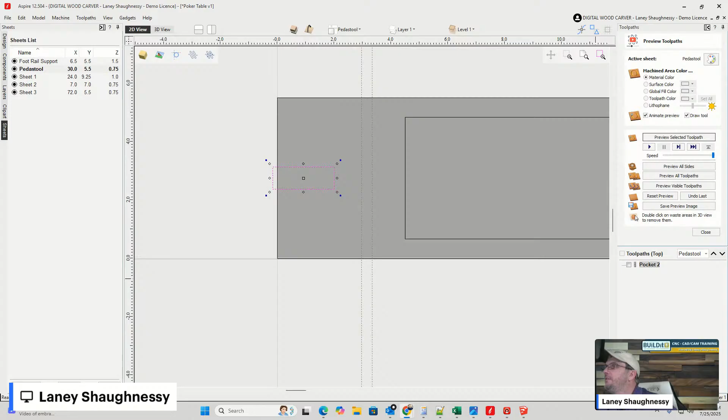Let's see here. Okay, y'all are just having a conversation. Let me see, it doesn't look like I missed anything. All right, so good, y'all can hear me.

All right, so on this cut, let's make one of these panels up really quickly. On this cut, it's very important that we go into the machine setup. This is important too for the machine setup, ladies and gentlemen. I want to make this cut really quickly, the 3D rough and 3D finish toolpath, and then go back to that footstool, because that footstool pedestal and the holding jig, that's how we're going to end off tonight.

The holding jig is what's going to be important, and I want to talk to you about that. Since we just made a change to that footstool, it changes the holding jig up a little bit, so I want to go back to that. But first, let's get this model cut done. Very simple model cut here.

We're going to select this vector right here, and we're going to go and do a 3D rough cut. Before I do that, I want to make sure my model position in my material is correct. My material is 3/4 of an inch thick, and my model - let me turn off one of the model components, which is the base here - my model is only 3/8 of an inch deep, about 0.355 or what have you. So on my model thickness, it's not very deep.

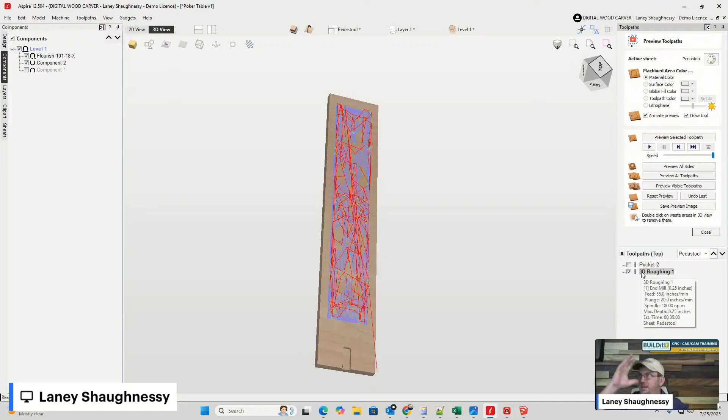This particular board is only going to have 3 toolpaths: the rough, the finish, and that little pocket cut. The 3D rough and that little pocket cut are both using a 1/4 inch end mill, so they can be done at the same time, and it really doesn't matter what bit you're using at that point.

Time for dinner, Laney. Yeah, it's starving to death.

So we have that 3D rough and then the 3D finish. Now the 3D finish has a lot of little detail, but a majority of it's big. So my go-to bit is going to be my 1/8 inch bit, but I'm also going to be using my 1/16 inch to do some touch-up areas. So on the 3D finish cut, I'm going to have my 1/8 inch tapered ball nose, and then I'm also going to have my 1/16 inch tapered ball nose.

Again, using the selected vector as the boundary, and again doing a raster cut at a 0-degree angle on those with no boundary offset.

That's it for this board. Once this is carved 8 times, we need 8 of these. Take them over to the table saw, tilt your blade, make your cuts, and adjust your fence. Do all.

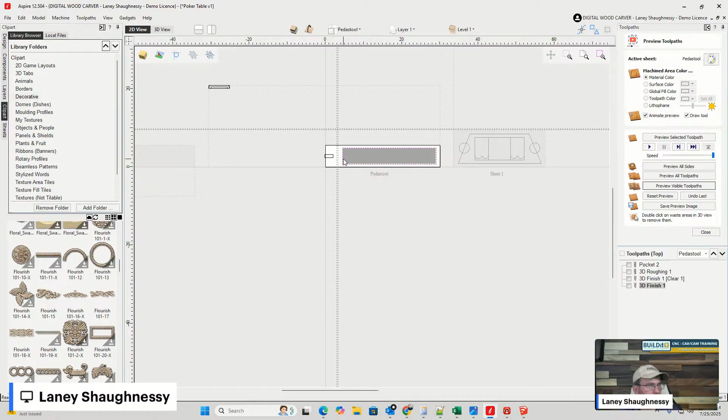It was dropped in, sized up. My opening, the rectangle, is 4 1/4 inches by 24 inches. So this is what that part's going to look like when it's done carved.

Now let's go in a little tighter here. Look at this, look at all this area right here. So what bit do I need to go in there to clean that up? Because that needs a little loving.

So bear with me a second. Let me make sure that my model resolution is still set proper. First of all, it is. Let me make sure that my 1/16 of an inch bit got run in this. It did. Let me go back into my toolpath.

Okay, this is kind of, no offense to Design and Make, but y'all step up your game, guys. So the model, I'm at my highest resolution, 50, and the model is very rough around the edges. And that roughness is translating. Even at the highest resolution, that roughness is translating here.

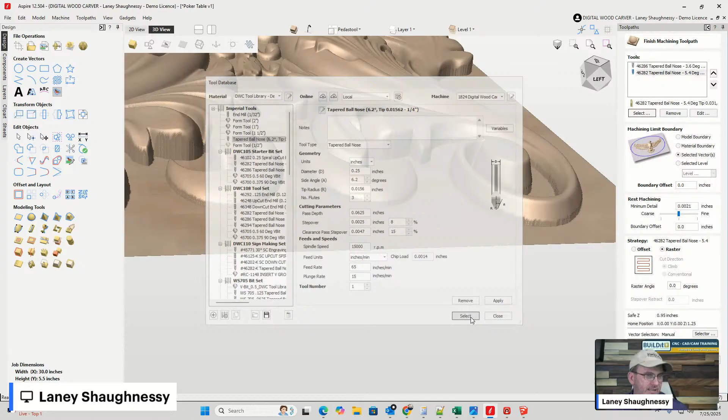So unfortunately, if I tried to come in here with a finer bit, let me just show you what happens. So I'll come in here and we'll use a 1/32 bit with a 64th radius. The roughness of the model.

And I'm not crapping on design and make, but if I'm spending $25 on a model, I know this is part of the free clip art, but if I go to design and make and buy a model for $25, I better be getting the highest resolution possible. Right? I love Vectric, don't get me wrong. And I love design and make. I love Todd, I love everybody over there.

Becky and all them, they're all amazing. But I don't want to have to jump through hoops. If I had Vectric VCarve Desktop or Pro, I'm going to show you what it's going to look like when I'm doing this smaller bit. Smaller bit's not going to change the outcome of how bad that model looks at the bottom of its base and everything, right? Now I could try to apply some smoothing, try to apply enough smoothing that it cleans up the edges some, but doesn't lose any of my detail on the top side. And from there, but adding a draft is only an Aspire feature.

I would not, Brooks, I would not do sculpting on this at all. I would not waste any kind of time doing sculpting on this. I would do an overall just, a blanket smoothing to see if that fixes anything. But coming back in here with the smaller bit and everything, as that progresses through, it does help.

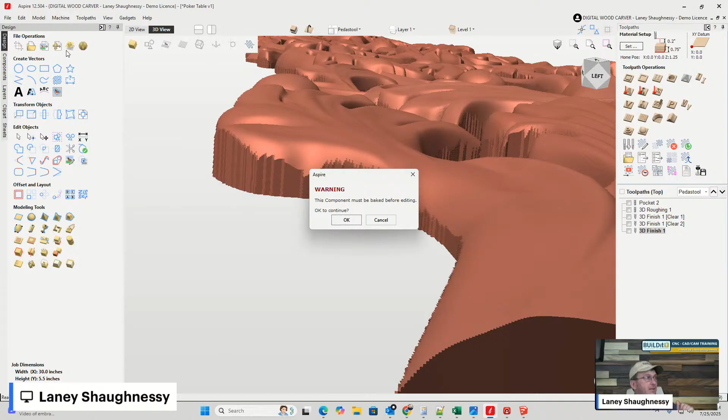Now the component wants to be baked, and that's fine on this one. I don't mind baking this one because this one is made up of all of these components. So that one component, when you drag and drop it, there's 18 parts in there basically that make up that one entire model, right? And so what the software is saying is, before I can smooth it, those parts need to be baked together. And I'm okay with that on this one. Normally I don't bake my parts, I keep my originals intact and I'll make a copy of it and all that. But on this one, I don't mind baking that component together as one.

Now, when I do that, again, I can go over here and try to smooth this. But if I smooth this, let's preserve the transparency. That was at maximum smoothing, what you just saw there. If I come in here and do a little bit of smoothing, because I'm trying to smooth the edges, not lose the detail on my top, right? So one without the other kind of thing.

So let me bring this up a little bit. And as we look at those cuts, so now I'm halfway, and as I smooth this over, I'm just going to go the full way for a minute. As I smooth this over, I'm smoothing out my detail up here and everything, and I don't want that rounding over and smoothing on there. When I'm here, I want those edges and stuff. So smoothing is not going to get me where I need to go on that, to an extent.

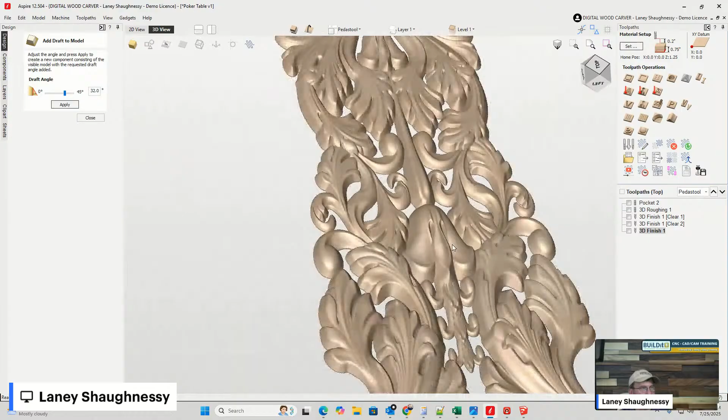Let's do it this way. Let's back it up to 22.5 degrees. So 11 doesn't give me a whole lot. 22 or 32 gave me more than I wanted. I'll live with that, my extremely high. Okay, so I'm going to live with that on my edges.

So I'm going to go back into my components here. I'm going to turn off this original model. I'm going to go back into this, and on this model with the draft... all right, that's about as far as I'm going to take that. So with that being done, I'm going to go back into my components, and I'm going to open my other area back up.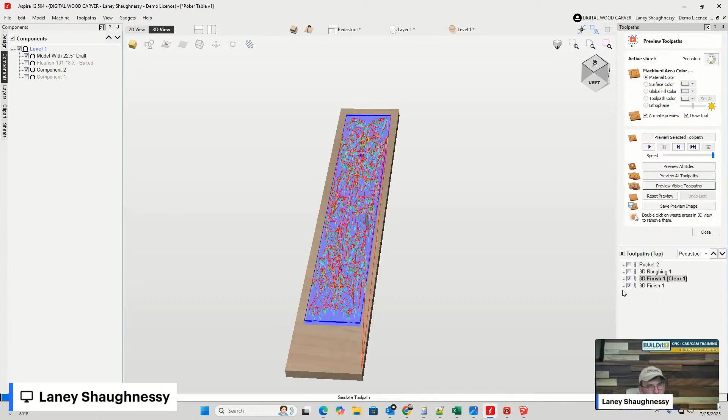All right, so it's wrapping up here. So now if I go back in there really quickly and reset that preview and preview all the toolpaths again, sorry about that, we should be good to go. Yes, so that is resource hungry. Man, my hands are tore up. So the stream probably froze for a moment while it was calculating that.

That bougainvillea, ladies and gentlemen. Couldn't find my work gloves, and that thing has tore me up, man. It's got these spikes, and they're harmful to humans. Well, they're really harmful to my dog. She got one in her belly, had to take her to the emergency vet. It stabbed her right in the stomach, swelled her stomach up, and cost me a little over $1,000.

Yes, you did. So cutting that bush out, getting it out of the yard and everything, well the thing keeps coming back, man. I thought I dug up all the roots, but with this heavy rain we've been having, it's come back, and these spikes are man. Went to cut them down and didn't have no gloves on. They just grab you, dude, they stab you and grab you. I haven't had any negative effects from the poison, but my hands got freaking stick marks and cuts everywhere on them.

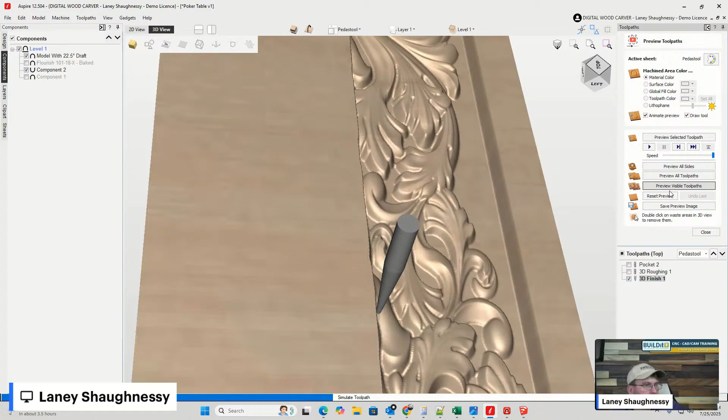But at the same time, I want to make sure that setting wasn't wrong. I don't know how it got set to 40%, but I want to check. Let me just see — I'll know right away. No, it's still...

All right, so it's still a little bit too big to get into the detail area. So my final toolpath will include... give me a minute. Don't want us to freeze up.

Okay, that's it. Spent too much time on that one.

Yeah, I know I'm breaking up — stand by, John, I'm not really breaking up. I'm actually not talking, I'm pausing, rather than sitting there going on. I'm literally in the middle of my thought or sentence, and I just stop talking — I might cut myself off mid-word. It's irritating, but y'all do me a favor and handle it, because my mind is somewhere else right now, like a space cadet. And I don't drink, I don't know what's going on, I don't do anything weird. Lord have mercy.

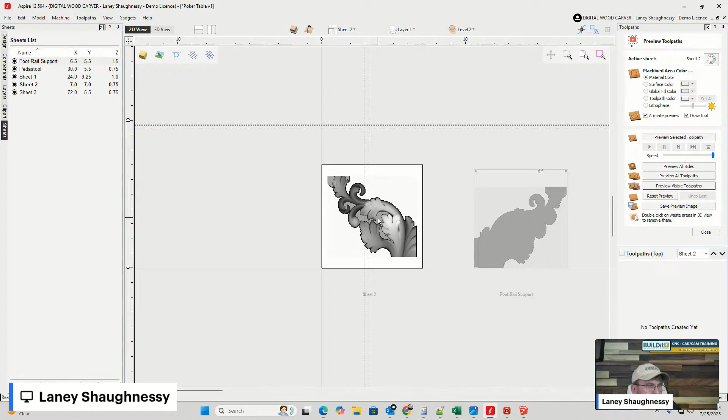So on sheet 2, which we're going to talk about in a second, I'm going to make it active and delete that. Sheet 2 is the last part — we're wrapping it up here, but this is important, this one above all, how we're going to machine this and how we're going to hold it — work holding and all that stuff. So we're going to delete this, delete that, get rid of that.

We're going to come back over here and select everything except for that measurement, and copy that to sheet 2. Now sheet 2 is going to be a larger piece of material, 3/4 inch MDF — that's what I'd recommend. The part itself and everything is going to be a mirror of our side 1 here. So sheet 2's model is going to be a mirror.

So I'm going to flip that horizontal and center it on the board. First, let me get rid of this vector there. Center that on the board, and then come to this new vector I created right here, and trim these two together. I need just one boundary on this particular one, so I'm going into my scissors and trim those two together to make one outer boundary all the way around.

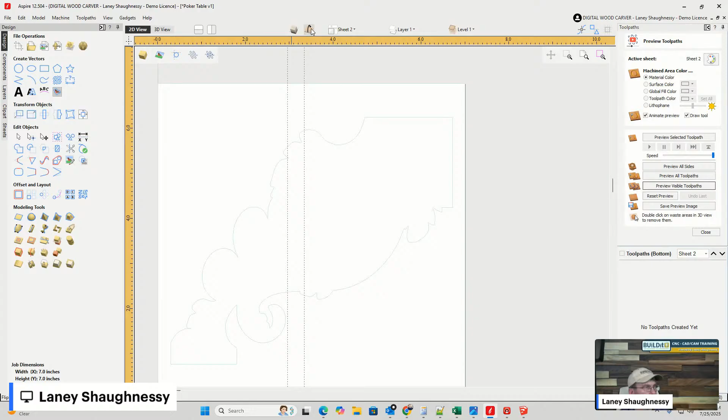Okay, now this is important — in here, I want to make sure that on side 2 of this sheet there's no model on side 2. So I'm going to flip over to side 2 and make sure there's no model over there, just one side. That's all I need in this instance.

And this model, which is a mirror to the one I'm actually cutting on the other side, is going to be subtracted. So in my job setup, my material setup, from the top of the board — it's important that I'm at the top of my material and that the component is reversed. So these 3 parts belong up here, and the zero plane can be there. But in the 3D view...

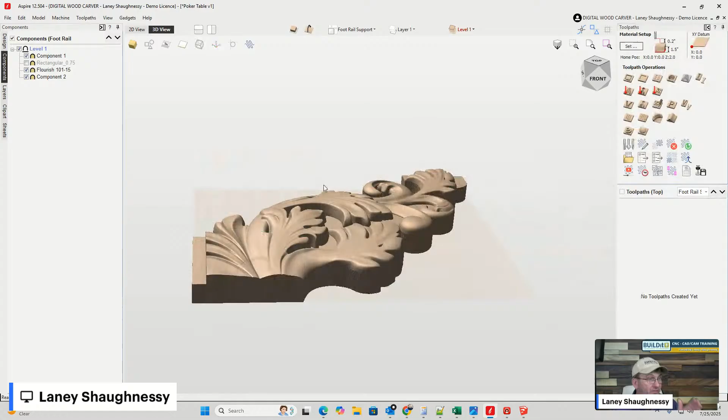So with this setup here, when I click OK, this is where, once this setup is done on this sheet, you go in and you create your rough cut, your finish cut, tool paths, and things like that. So for me, it would be selecting the vector.

And in this case, we have a new vector, new layout, right? So we come in here, and these two parts have to be trimmed together because we added that tenon on after the fact. So trim those two together.

Now, this tenon here is 3/4 inch wide, but it should only be 1/4 inch long here. This looks a little heavier than 1/4 inch, so I'm going to measure this real quick. And it's 1/4. Okay, good. All right, so it looked a little heavier, so optical delusion.

All right, so this vector here, selected vector is the boundary. Material setup, with the proper 1/16 of an inch above the part, because it's going to get milled away. All this brown wood here is side 2, ladies and gentlemen, right?

Side 2. Now, when I create the tool path, we're actually going to be milling this wood away, not just in here. We're going to be milling away this front half of this board. Very important to understand this. So all of this is going to get milled away.

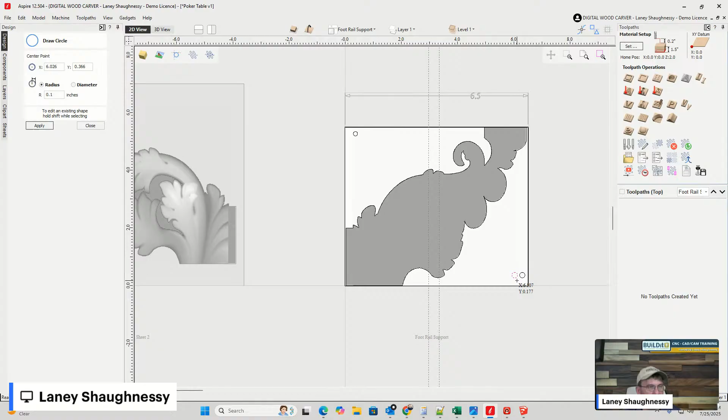You can draw a little vector, and in your Vectric software you have what's called manage keep out zones. If you've never used keep out zones before, let's pretend I have a screw here and a screw here screwing down into my wasteboard or a scrap piece of wood, and I don't want my router bit hitting those areas.

Those are areas I want it to stay away from. I could draw a vector. It doesn't have to be a square, doesn't have to be a circle, doesn't have to be anything, but I can just draw a vector, make it whatever size I want, around kind of where that screw is going to be.

In my keep out zones, I can say, okay, from those selected vectors, let's say we stay an eighth of an inch away from those selected vectors, and then we can create that keep out zone. So any toolpath that gets created is going to go around these two areas.

So if I come over here and have those turned on and create my 3D rough cut, quarter inch end mill, material is the boundary - no, selected vector is the boundary, and I want that rectangle selected. And I want to go calculate.

Hold on a second. Okay, it is going to violate that, so I can't just have that circle.

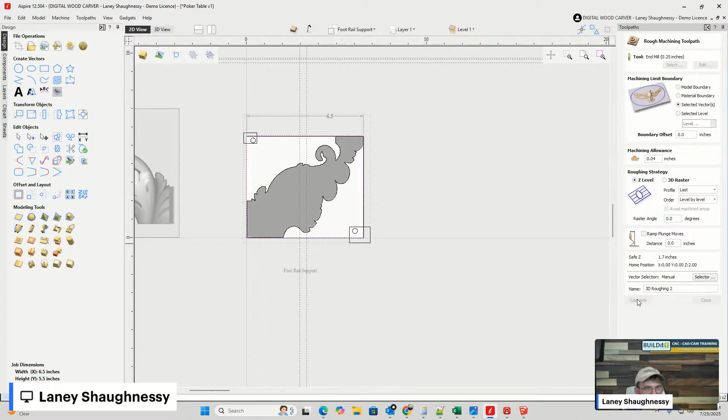Now what are you violating? Let's see - the toolpath could not be created without violating the keep out zones. Moves where the toolpath violates the keep out zones are marked. So it's saying that it's violating the keep out zones.

That's so stupid - the whole purpose of the keep out zone is not to violate the keep out zone. All right, so that's all right, I'll fix it. Node editing - insert a point. Don't know why I have to do this, but that's okay.

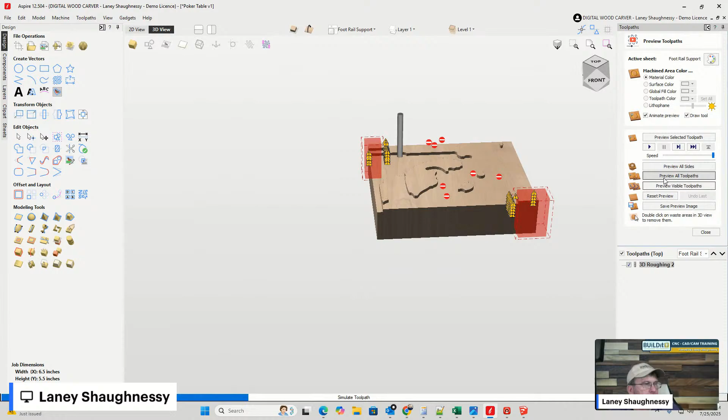All right, I'm okay with that, whatever it's telling me here. So when we preview this cut, okay, it's just going into my little offset area, the little eighth inch offset area, which is no big deal. I'll fix that in just a second. But this is important.

3D finish cut - on the 3D finish cut, I'm not even going to waste time with it. I'm just going to go straight to, no, not the eighth inch bit, just the sixteenth and the thirty-second. Not going to do an eighth inch bit, it's just too big for these small parts to even really do any good. At least using the sixteenth, they'll get a majority of the material away to reduce the run time, so the smaller bit doesn't have to do a lot of work.

What's important here is when this is all said and done, we only have to deal with the hold downs for one side. We don't have to deal with it when we flip it over. In this scenario, we've got 2 screws going in, and the toolpath goes around those screws, so we'll have these 2 posts sticking up that need to be gone when this is done. We're going to have to take a flush trim handsaw or a chisel, I don't care how you get it, but you're going to have to knock those little pedestals off. I'll show you what I mean in just a second.

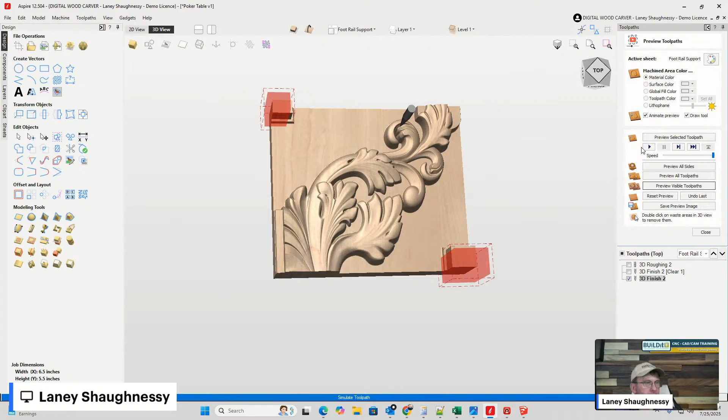All right, now let me turn off these keep away zones for a minute. On here, our part is going to be carved out like this, our half of our board. The bed here, this depth right here is 3/4 of an inch. It is our 0.6875 plus that 1/16 of an inch that got burned right out of the get-go. This flat plane is 3/4, right here.

Now, because of where the screws were, if you use two-sided tape, hey, that was great, you didn't have to do any screws, you don't have to screw around with it, none of that stuff. But these two little pillars, let's say that's where we had screws screwing this part down.

Now here, that post on both corners needs to be cut off. It's got to be cut off, flattened up. I don't care if you use a chisel, a handsaw, a table saw, I don't care how you do it, they got to be gone, they need to be flat. You could take the whole corner off if you want to, just literally nip that corner off at a diagonal, boom. I don't care, just they got to be gone. It's important that this area here is flat, and this is 3/4 of an inch thick.

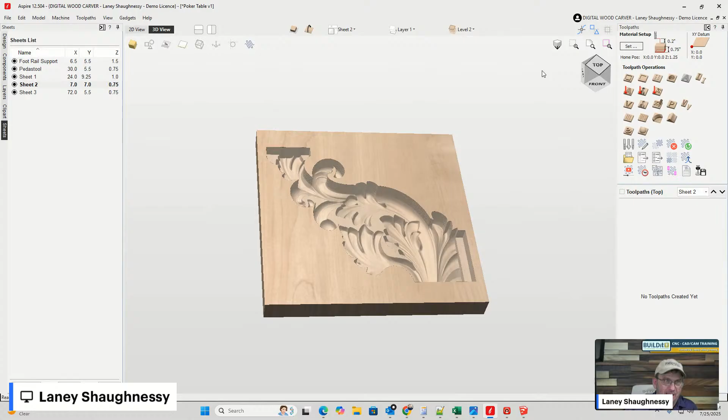Face glue 2 pieces of 3/4 inch MDF. This part is going to get cut out in a negative - the part's going to be a negative cut here. So you're going to run your toolpath on your MDF to create this negative piece. And this negative piece, it's the model, instead of up, it's in, carved in.

Now when that model gets cut, that part's going to get flipped over and pressed down into here, and this is what's going to hold your piece of wood. So this will be clamped on the table. Your piece of wood is going to be clamped, pressed down into there. It's going to be clamped down.

And you're going to run the side 2 model cut. It's going to cut down to this plane right here, down to this surface. And when it cuts down to that surface, this part, when it comes out, is going to be a finished part. You won't have to do any profile cutting.

You're not going to have to do any - you might have to do a little bit, right on the seam, a little trimming. Not trimming, but sanding and everything, but very little. Your 3D finish cut is going to carve just like it did on the other board you just saw, but it's going to carve the second half.

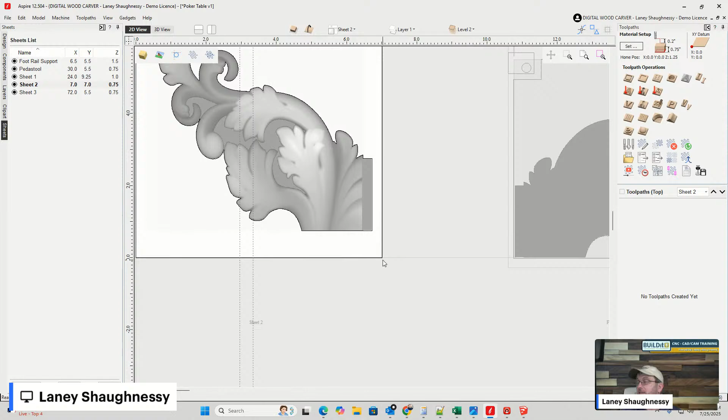Edwin asks, is there anything to be aware of when positioning the negative on the CNC table regarding XYZ zero position? No, the cut is based off the bottom left corner. So on this tool path, the side that gets cut is based off the bottom left corner of a 6.5 by 5.5 part. On this part, the negative board itself is 7 by 7. So you either want the part getting cut out of the same size material, or you need to make sure you're starting from your offset of that one inch difference.

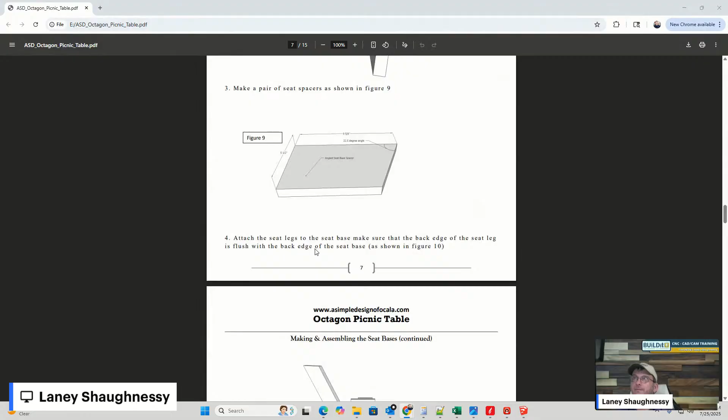Along with that is a PDF that has the material list and cut list, plans and dimensions, instructions - a full set of step-by-step build plans. The same would go for the octagon poker table.